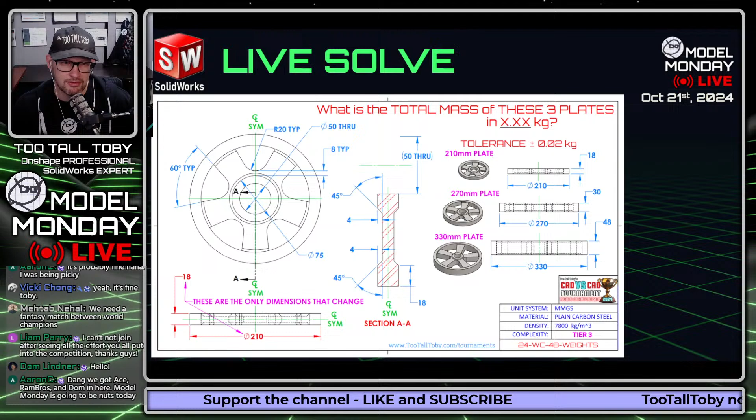What we're going to do today is 2 CAD speed modeling challenges. We're going to have some tournament updates. We're going to do a live solve using SolidWorks, and we're going to talk with the best chat ever. The live solve I'm going to do is going to be this plate, the weight plates from the tournament on Friday. I just think this is a cool model. It's a cool use of configurations and configuration tables in SolidWorks. I think it'll be fun to do configuration tables here using SolidWorks. We'll talk a little bit about that in just a few minutes.

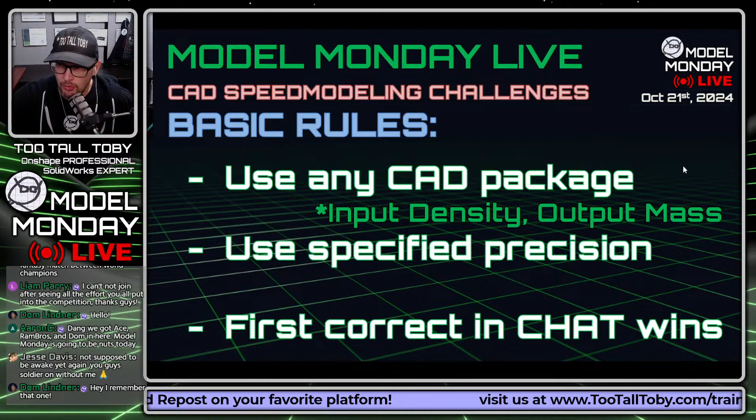Make sure that when you go to answer, you use the specified precision. So if I say answer in x.xxx, make sure you answer in the specified precision. The first correct answer in the chat will be declared the winner, will earn a point, and will end up on our Model Monday Live leaderboard on the website.

For this Model Monday Live episode, the materials that we're going to use are going to be plain carbon steel, 1060 aluminum, and ABS with the densities listed below. Make sure you've got the correct densities, otherwise you're not going to come up with the correct mass. You might need to create a custom materials library to facilitate that, but just make sure that you've got these correct densities ready to go so that you can compete and have fun and see how you do against the pack, and just see if you can even finish the challenge in the allotted time.

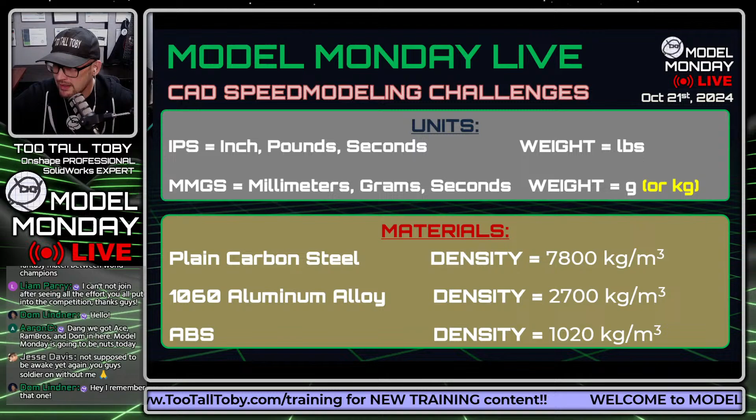Even that in and of itself is quite the achievement. Finally, the advanced rules are this is meant to be fun and good-spirited. Occasionally I will make mistakes, some of my drawings are a little questionable. We use what we call the Toby standard here on TooTallToby. And the Ivan exploit is permitted. Don't think you're going to be able to use it in the first one, you might be able to use it in the second one today.

And if you're not familiar with the Ivan exploit, I just want to say Aaron C. and I made some great progress on that video last week. It's just about done, we're doing some mixing with the audio, trying to get all the audio levels right and everything. But that video is going to be out any day now, so you guys keep looking out for that. Put a 1 in the chat if you're excited about the Ivan exploit video.

Aaron C. and I are, it's a real work of art. We've had some back and forth on it. We had to cut some stuff, leave some stuff on the cutting room floor. We might end up doing a director's cut, an extended 3.5-hour version of the video at some point. But for now, we're just trying to get out the regular 5-minute video to explain the Ivan exploit. So it's going to be coming out very soon.

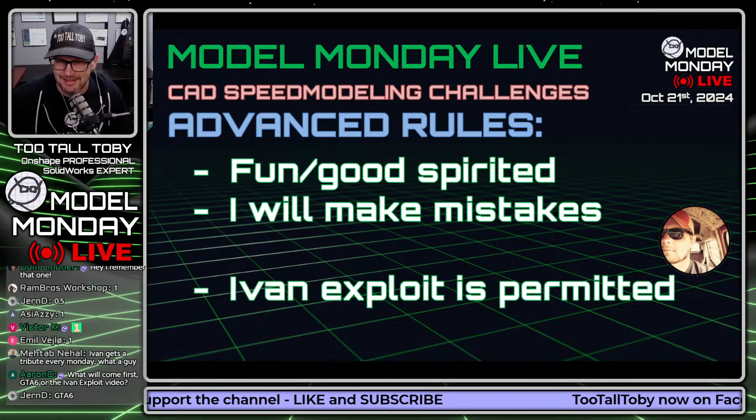Which will come first, GTA 6 or the Ivan exploit video? I mean, if we keep making progress the way we have been, me and Aaron C., it's going to be out any moment now, any moment.

All right guys, with that, let's get into our first challenge. As soon as I show this 2D print, I am going to challenge you to take that 2D print, make a screen capture so you can move it over onto your second screen, and then use that screen capture to model this part. Then we're going to keep talking about what's going on in the world of TooTallToby. So here we go. This very first challenge for all of you begins in 3, 2, 1, go.

What is the mass of this part in XXXX grams? This part is called fully defined, 24-10-11. You can see there's some notes in the upper left. The model is solid. That decal is for illustrative purposes only. You can tell this is an Australian rules football. Pretty wild sport, it's played on an elliptical field or an oval field, not a rectangular field. What is the mass of this part?

Plus or minus 3 grams. It's a solid part. You'll notice there's this groove running through the model in 2 directions. That groove has the same geometry. It's called out in that detail view and also in section CC, so look out for that groove. It all kind of comes together in the middle there, so the part's symmetric in 2 directions. What is the mass of this part?

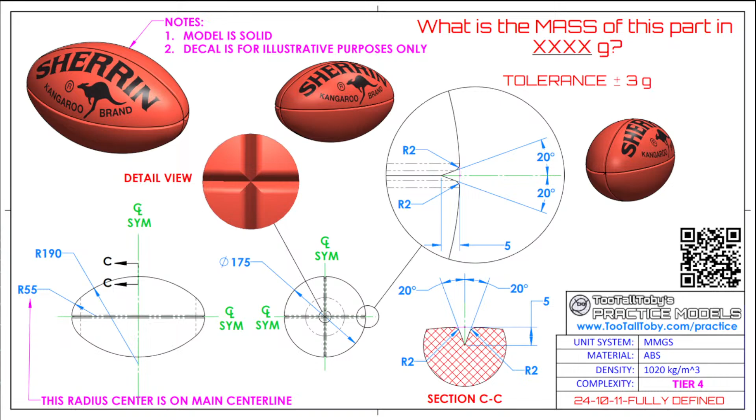All right guys, take a screen capture. Make sure that you have that model, that image captured onto your second screen so that you can continue modeling while I continue talking to all of you about news from the wonderful world of TooTallToby.

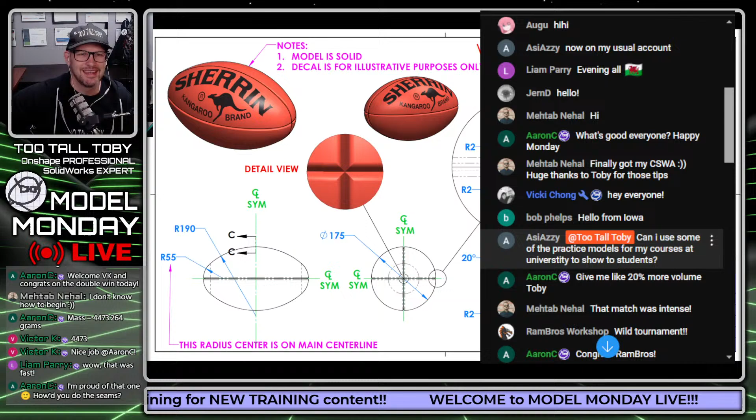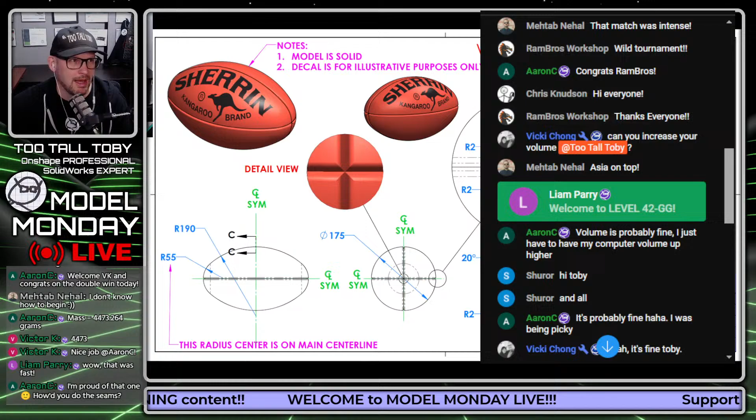As far as what's best for everybody involved, the best thing is to get them to sign up on the website or to get those party packs, and then you can print those out. You can use those party packs however you want - print them out, share them, do whatever you want with them. Maybe don't email around the PDF, but if you need to use it as an instructor, that's fine.

Let's see here. How did we get an answer already? Aaron C came in with an answer right away. Victor K came in right behind him. Liam says, wow, that was fast. Yeah, that was fast, my goodness.

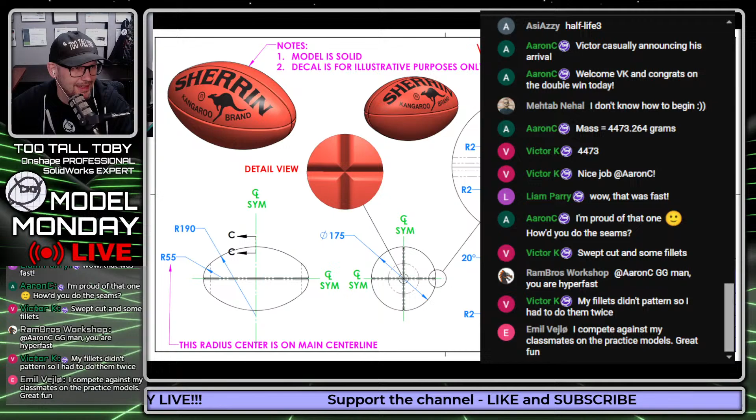Little discussion there of how to build the model. I like it, keep it going guys. Everybody in the chat can learn.

Emil in the chat says, I compete against my classmates on the practice models - great fun. Nice, awesome, that is awesome. Yeah, that's great, and we're continuing to evolve that app. That's why we want to get as many people using the current version so we can keep in touch as we continue to evolve it.

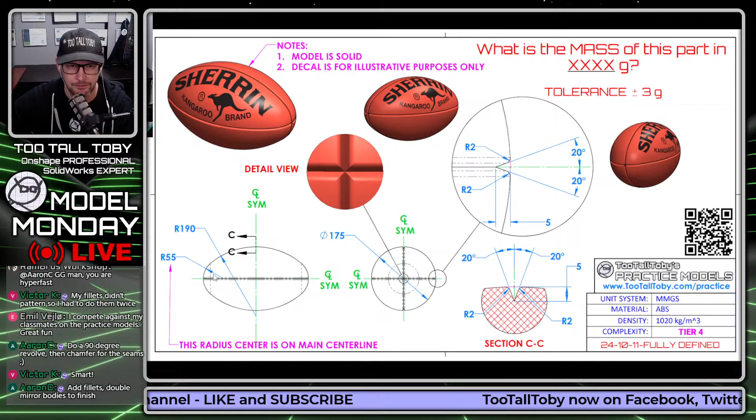All right guys, take a look at the chat if you want to get some pro tips from some of the fastest speed modelers in the world on how they're modeling this current part so fast. They're having a good discussion - always good to learn from these guys that are finishing so fast.

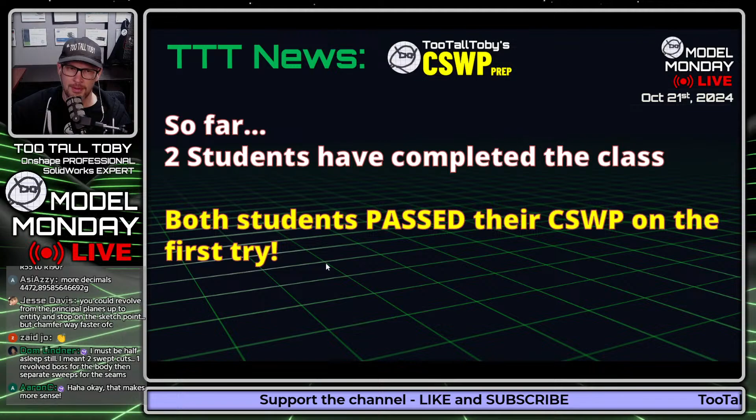It really does give you everything you need. There's even a section where I talk about how to get a hold of a free CSWP certification code. Maybe you didn't know how to get your CSWP certification for free. There are different avenues you can go down to get it, and sometimes those avenues are open and maybe you don't know about them. We talk about that in the training class as well.

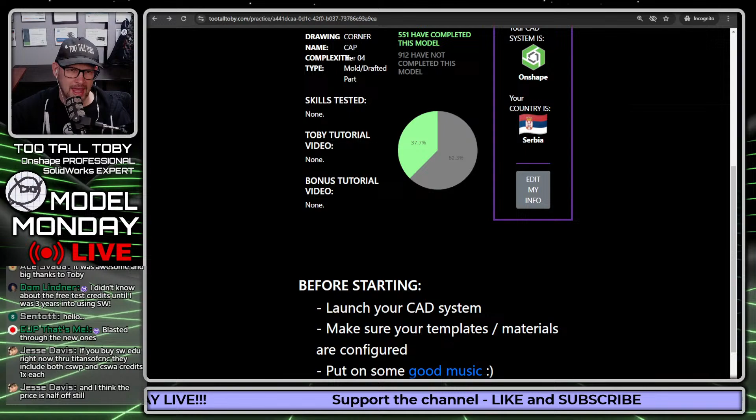Jesse Davis says, if you buy SWEDU right now through Titans of CNC, they include both CSWP and CSWA credits, 1x each. Nice, that's a good deal. You could buy that, you could buy my class, and then you could be on your way to getting CSWP within a weekend. You could do it all in a weekend.

EUP says, I'm always right-clicking on that drawing to open in a new tab so I can read the details. Yeah, that's a good enhancement request. Appreciate that, EUP.

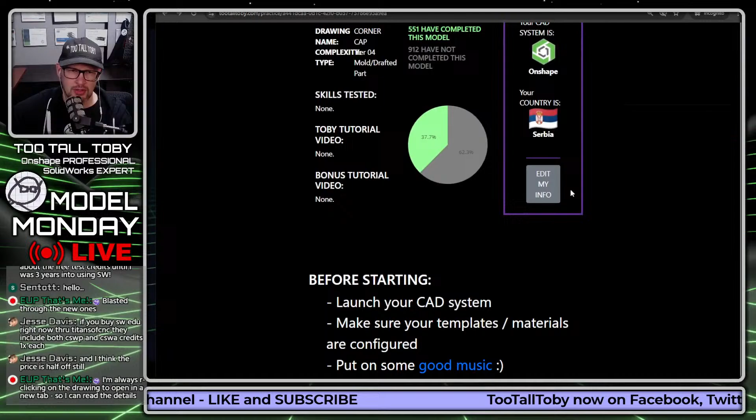If the drawing ends up too small, you can zoom in or out, but then the clock gets small too. The drawing doesn't really change when you do that anyway, maybe once you get to a certain point it gets a little bigger. You can hold control and use the middle mouse button to zoom in and get it a bit bigger. It looks like once you get to a certain point, it becomes reactive.

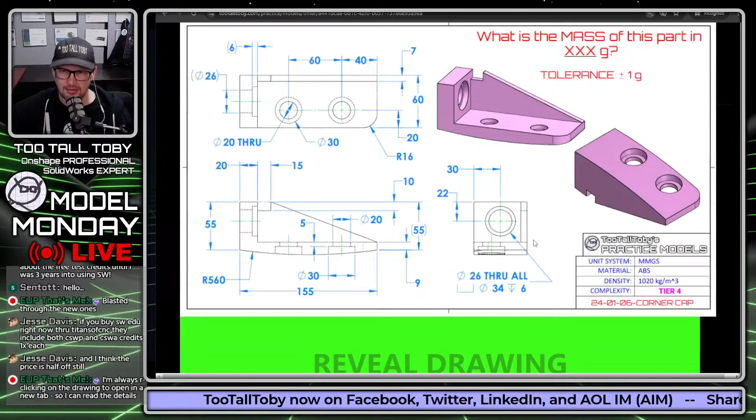So that could be a hack, or like you said, you could move it onto another screen, or right mouse button, open image in new tab. Oh yeah, that's a pro move right there. I thought you were saying that was an enhancement request - it already works! Sweet, thank you.

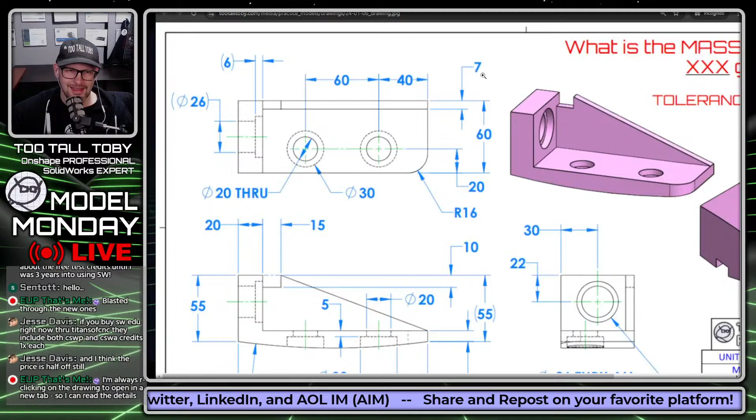Yup, that's me. EUP, that's me. That's awesome.

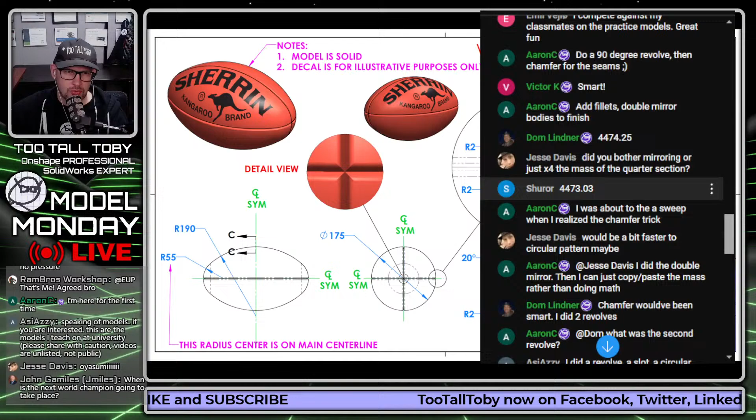Let's see here, the first answer comes in from Aaron C., 4473. Victor K., 4473. Dom, 4474. Shuror, 4473. Rambros Workshop, 4473. Azi, 4472.8958564, 46692 grams, very nice. Who else we got in here? Anybody else coming in with an answer? Just a few people trying to take this one on.

That's all right, everybody's saving up their energy for the second one.

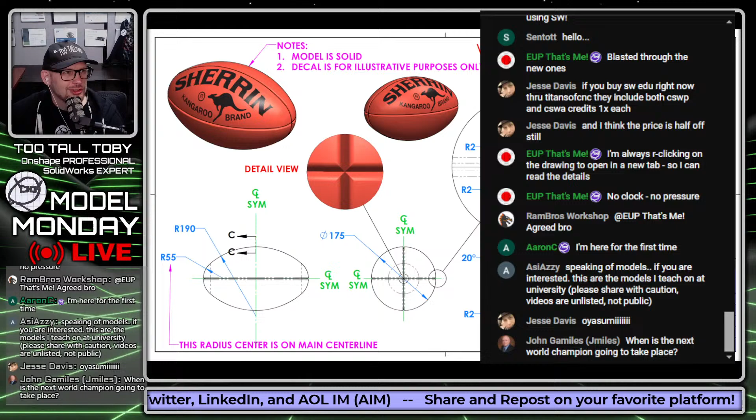John is in the chat: when's the next World Championship going to take place? Probably next year, we'll have 1 or 2 tournaments between now and then. The World Championship usually runs in October, usually the finals run October, November, depends on how we schedule things out. But I like this timeline we did this year, we started August 30th and ended October 18th. That's a good spread, a good 6-7 week spread, I like that. Probably do similar timing next year, but we'll have other tournaments between now and then.

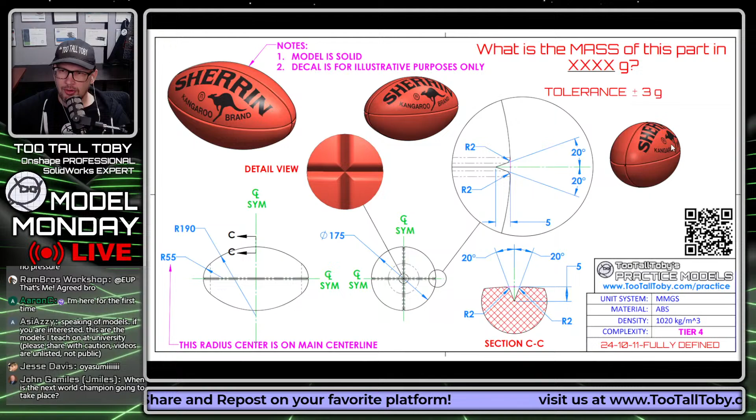Guys, the correct answer for this challenge... maybe we should talk about why this challenge even came into existence here. Fully Defined, you can see it's Australian rules football.

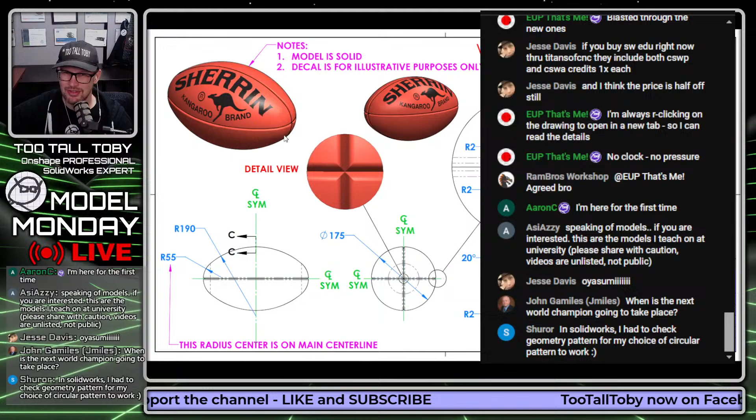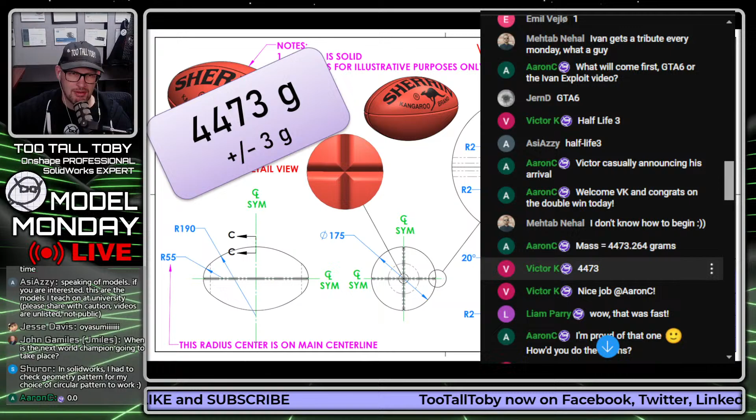Guys, the correct answer to that challenge was 4473, and that means that the winner of that challenge was none other than Aaron C, coming in with that first answer, 4473 grams, plus or minus 3 grams. Gave you guys lots of tolerance on that because it's a pretty high number. 4473 grams, that is correct.

Well done my friend. I liked reading through, seeing how you guys did it. It was really interesting. I didn't do the same thing Aaron C did, a 90-degree mid-plane revolve, then added a chamfer for the seams. I didn't do that, I did it with a sweep. I did a 90 degree mid-plane revolve, so I ended up with this little section here.

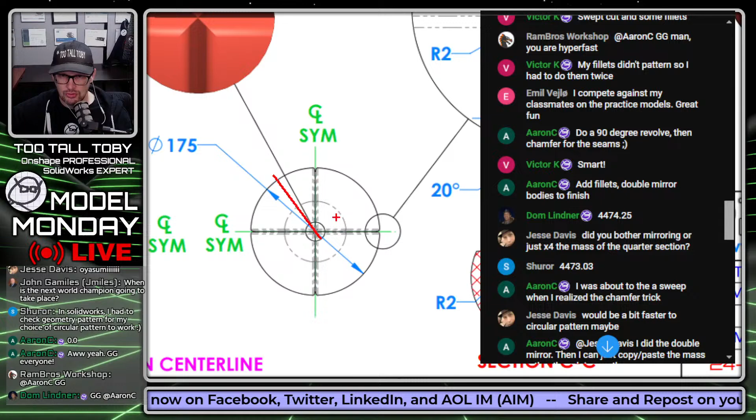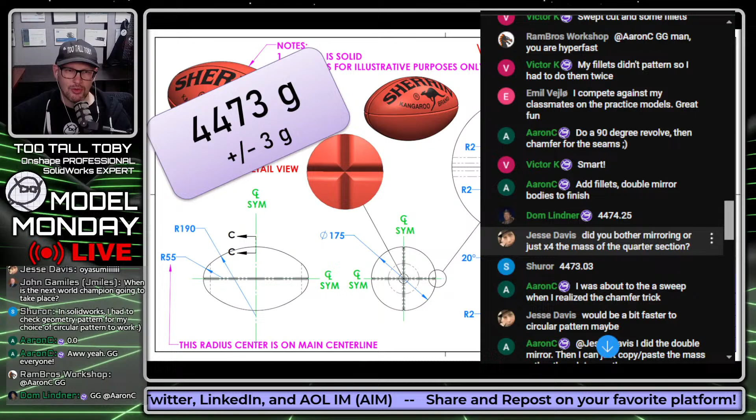And then I did the sweep, and then I patterned that around 4 times. So there you go, sweep, then fillets, then patterned it around 4 times. Pretty cool, I like being able to read through and see how you guys did it. I love seeing all the different suggestions.

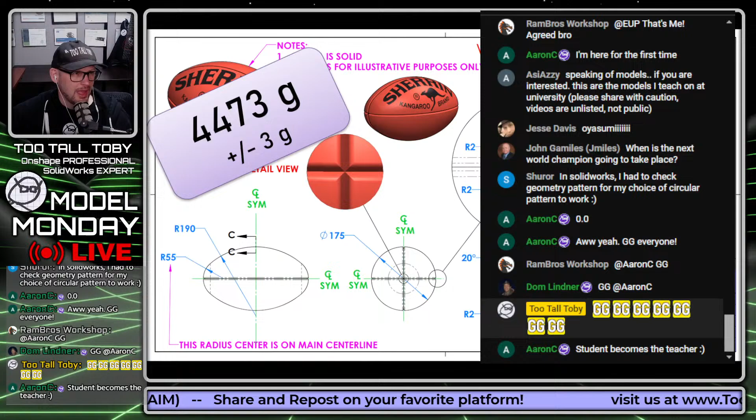Please use it liberally. All right guys, super fun part though, yeah. Yeah this is a cool part, I like it. Sounds like a pretty complicated game, Australian rules football. Like I said, it's played on a round pitch or oval.

All right guys, here we go, next challenge. G, I got it. And number 1, very nice, very very nice. All right guys, here we go, next challenge. This next challenge for all of you begins as soon as I go to full screen, and that challenge begins in 3, 2, 1. Go. What is the mass of this part in XXXX grams?

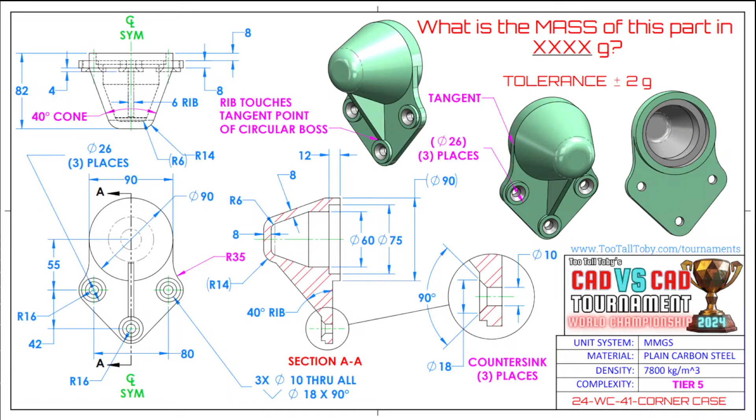Now this one's going to take a little while, so I figured this would be a good time to go through and do a little of what we like to call a live solve. We're going to do this live solve using SolidWorks, a wonderful 3D CAD program, parametric 3D CAD modeler, that will allow us to introduce some new stuff.

Blue Byte Systems in the chat. You got to fix your username. Amen Jlili is here. Welcome my friend, thank you for joining us. I just gave you a shout out the other day in the Discord, too. Somebody was asking about API tutorials and assistance. Welcome, welcome. These guys really know their stuff when it comes to API tutorials and assistance and custom programming in SolidWorks. Blue Byte Systems, check them out. Say hello, old friend of the show.

Welcome, welcome. So what we're going to do is a little bit of SolidWorks 3D modeling here, a little bit of what we like to call a live solve. And what this means is that we're going to take a look at this 2D print, and we're going to try and solve the answer to this challenge live right here, right now for all of you using SolidWorks.

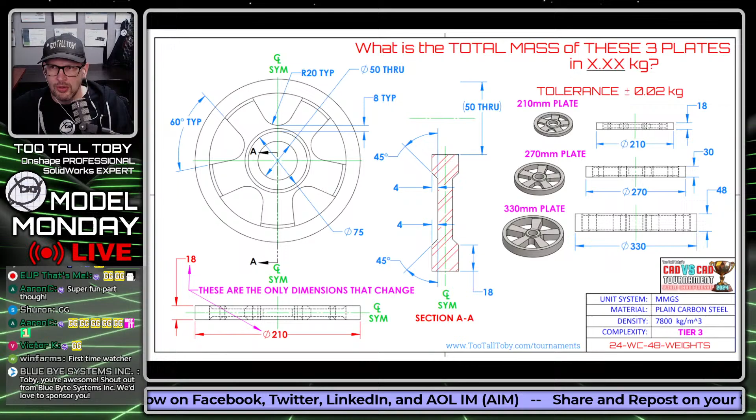What is the mass of these 3 plates in kilograms? Now this is a kind of cool, fun model because there's not only a few ways to solve the model itself, but there's also a few ways to solve the question. The question is, what is the total mass of these 3 plates in kilograms? So how do you come up with that total mass?

Do you make an assembly? You can make an assembly and add 1, 2, 3, but then that would mean you have to model all 3 of them. Do you do it with configurations? Do you just make one, calculate the mass, type it somewhere, and then modify the model and type the mass in, like type it into calculator plus, then model the second one, type it into calculator plus, then model the third one, type it into calculator, enter, and now you have the total mass in kilograms? There's a lot of different ways you can come up with the answer as well.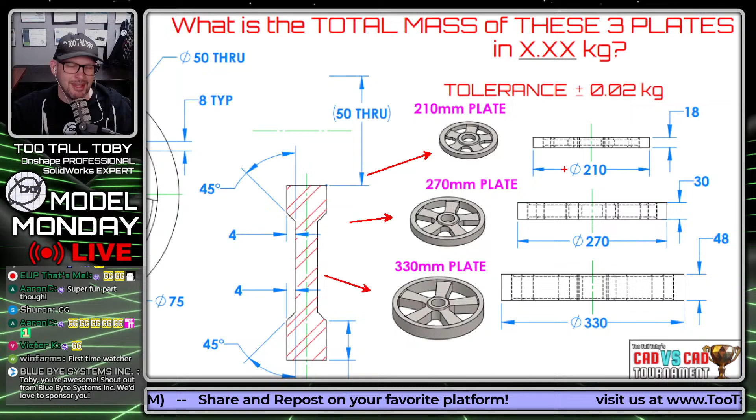So what I'm going to do is I'm going to go through and model it using SolidWorks. I'm going to model it using configurations because it'll give us a good chance to look at what are called configuration tables. And that's something that you actually need when you take the CSWP. You have to know about configuration tables. It's something that comes up when you take the CSWP - they're going to ask you a question specifically on creating and managing configuration tables.

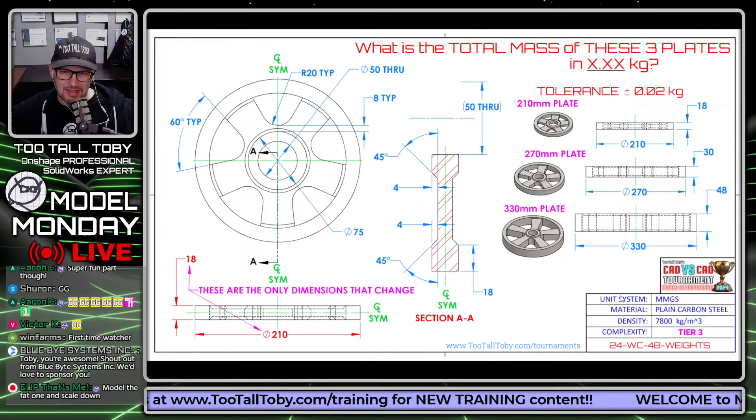Yup, that's me. And the chat says, model the fat one and scale down. Unfortunately, it's not scale - it's only these 2 dimensions here that are changing. These are the only dimensions that change: 18 and 210. Nothing else changes, so everything else is staying the same. Only those 2 dimensions are changing. What is the total mass of these 3 plates in kilograms?

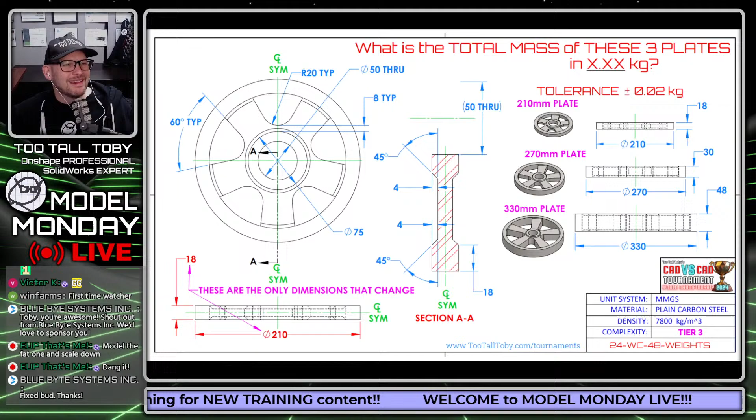Yeah, so anytime we're modeling up a part in 3D from a 2D drawing, the first thing we need to do is think to ourselves, what's the first sketch going to be? Blue Byte Systems fixed it, nice. What is the first sketch going to be? Where's the origin going to be located?

So we're going to go through, we're going to model this thing up in SolidWorks as a live solve. And here we see what that 2D print looks like. Whenever you're going from a 2D print into a 3D model, one of the first things you have to determine is where will my origin be and where will the first sketch be located.

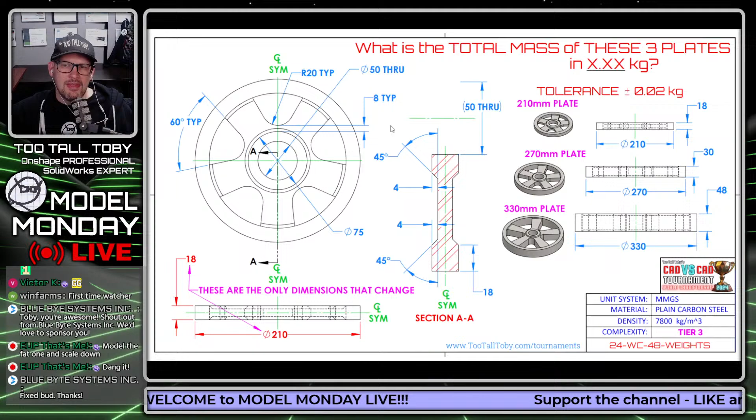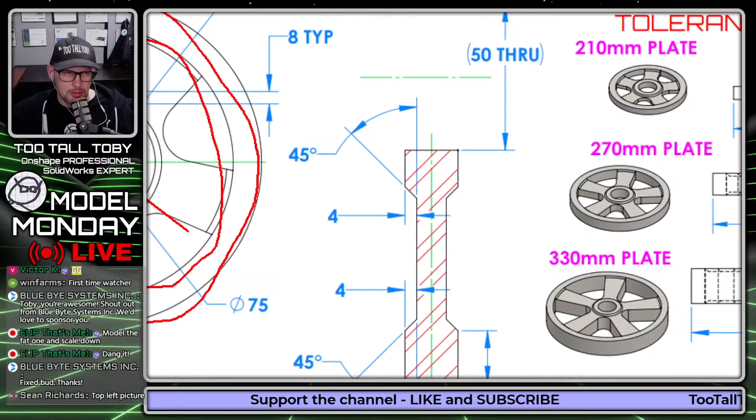In the case of this model, it's tempting to say that the origin is going to be right here in the center, and I'd agree with that. Whenever you have a round part, that's pretty much where the origin is going to be. It's tempting to say my first sketch is going to be this revolve sketch, then the inside, then the spokes. That's an option, but a smarter option, one we saw some tournament runners use, is to create a center line at the origin and create this shape as your first sketch. So that's what we're going to do.

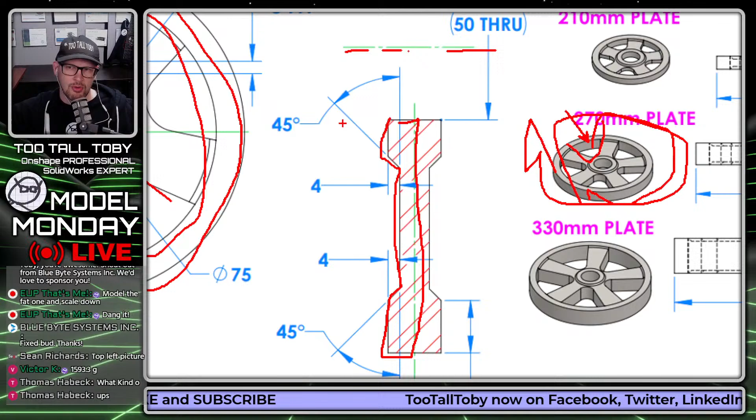We're going to create this shape as our first sketch and use it to revolve into this overall plate. Then we'll do a cut extrude for one of these triangular shapes to remove material, and then a circular pattern of that cut extrude to pattern the spoke around. From there, we can find out the answer.

What is the total mass of these 3 plates in x.xx kg? You can see that when it comes to these 3 plates, the only dimensions that are changing are these dimensions here. The remaining dimensions on the model are staying the same.

So let's take a screen capture of that. Go new here, do a screen capture. I'm going to take that screen capture and move it over to my second monitor. Then I'm going to change my layout here so you guys can see some of my keyboard shortcuts as we're going through and modeling this. We're going to model this up in SolidWorks. I'll be using SolidWorks 2020 here because I like it and think it's good.

Now we're going to do a new part here. The part is going to use millimeters, MMGS, and plain carbon steel as the material. You can see I've got a template here for MMGS and plain carbon steel. It's always good to have templates to help you save time and save repeat work.

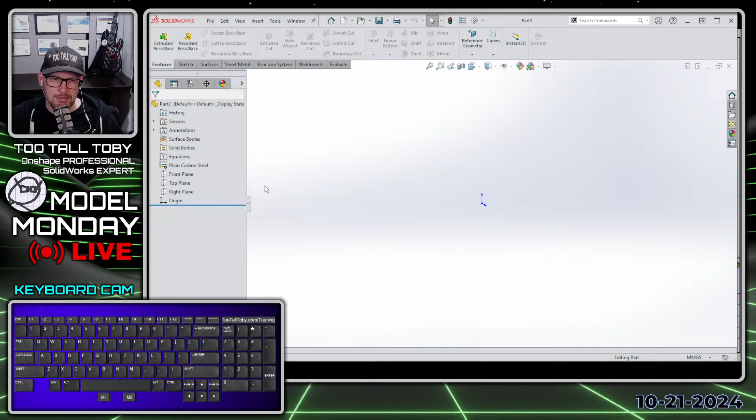What I'm going to do is go to my right plane, begin a sketch, orient the view, and then choose to create a center line right at the origin. That gives me my starting point for this overall design.

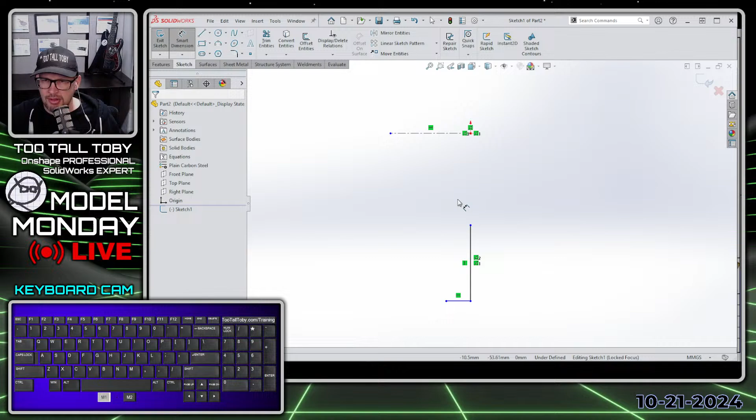Sometimes what I'll do is create part of the design first - maybe a line that comes down like this and then a line that comes over. Then I'll hit escape, press the S key to go to my smart dimension command, pick the center line, pick this line down here, and choose to make this a doubled dimension. As I cross over that center line, it becomes a doubled dimension, so we'll double that over to the other side and type in the value 210, 210. That helps me get a sense of proportion.

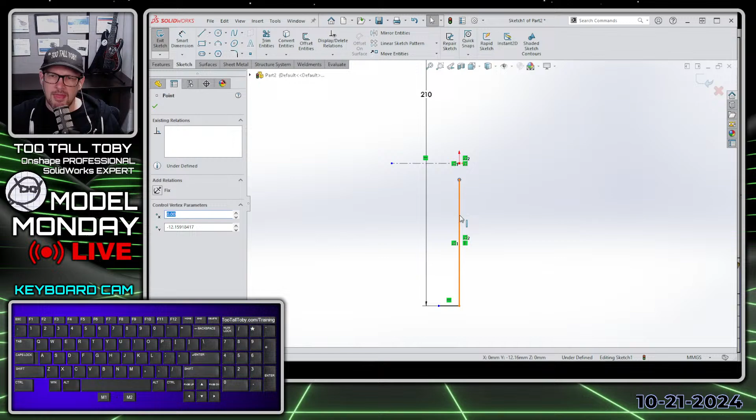Now this line going up is actually going to end up being a mirror line. So I'll just drop it wherever I can up here, then click on that line and choose to make it for construction, because now I'm going to draw this line that comes up in this direction, to a distance of 18. Enter. I'll create a line at 45 degrees, a line that goes this way, a line back up at 45 degrees, and a final line in this direction - this final line will go to our ID of 50.

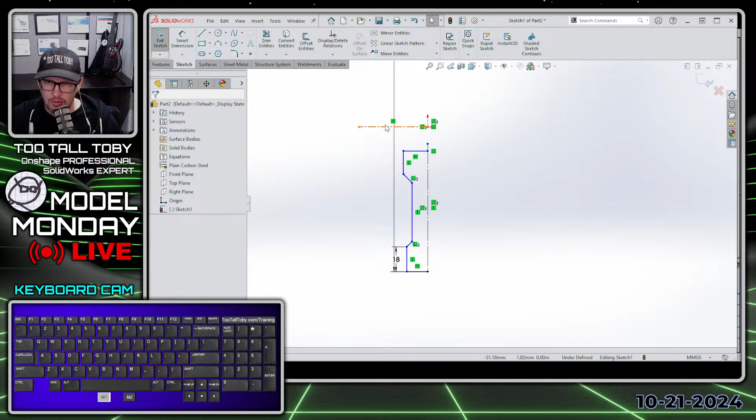So I'll close off that sketch, hit escape, and now I've got all this geometry right here with that center line. I can take that geometry, window select it - you can do a window select or a crossing select, either one - then choose mirror entities and quickly mirror that geometry right across.

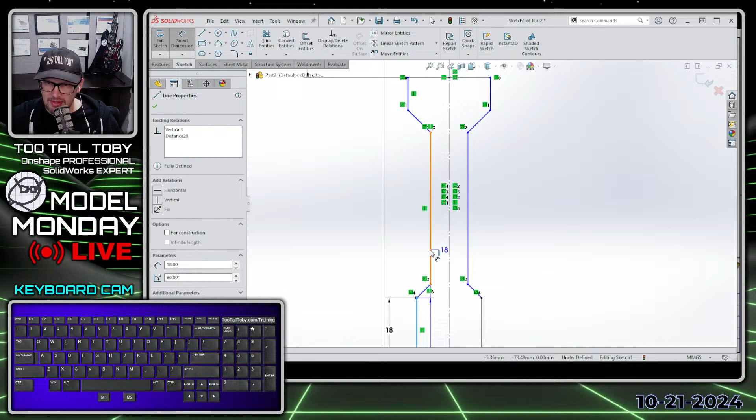Now it's just a matter of adding a few dimensions, like this dimension here to the ID, again crossing over that center line. That's going to be 50, and this dimension from this line to this line, the overall width of the plate, is going to be 18, at least for this first version. Then the distance from this line to this line is 4, and the distance from this line to this line is also 4.

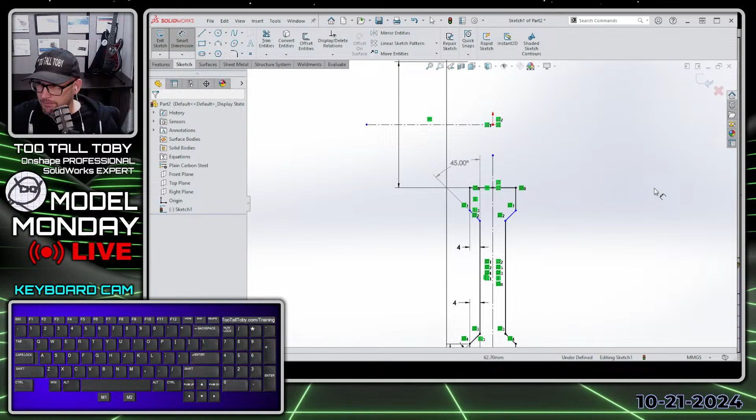Of course, we could also make those lines collinear. The angle here is going to be 45, and it looks like I picked up on a perpendicular relationship, so I could skip this extra angle dimension, although if I do put it in, SolidWorks will just automatically make it driven, since I set that option the first time it asked. Now I'm going to create the final dimension from this point to the center line, crossing over the center line, and that's a dimension of 75 millimeters.

Now I've got a nice fully defined sketch, with all the geometry I need for that revolve. Since this sketch has multiple center lines, I'm going to pre-select the one I want, then choose Features Revolve, so SolidWorks knows which center line to use. If you only have one center line, SolidWorks automatically puts it in that box; if you have multiples, you can pre-select it. So we hit the green check mark, and there we go.

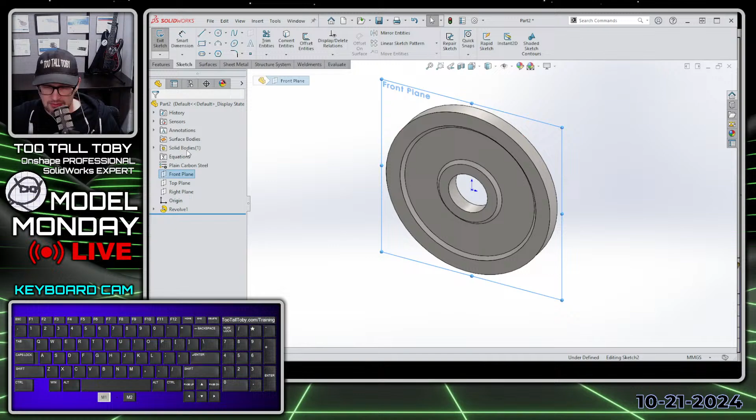There's our first feature, and that's really the majority of this part. Now all I need to do is get that cut extrude in there. So I'll choose the front plane, begin a sketch, orient my view, take this edge here, since that's kind of the outermost edge of that cut extrude, and choose to do a convert entities there.

So now that's a circle traced right over that edge, a circle in the current sketch. Then I'll create a line that comes from that circle, down at an angle, back to touch the end point, into a radius with a single click, coming off of that with a tangent relationship.

Let's see, where's tangent? Is it this one or this one? This one — tangent relationship — and drop that onto that line as well. Nope, that wasn't tangent, so I'll just pick this point here and choose to make those tangent.

I don't want these two lines to be perpendicular. You can see SolidWorks gave me perpendicular there — I don't want that, so I'm going to click on that line and press delete. Then a little trick you can do is take this point, hold control, pick this point here, let go of control, and make those vertical.

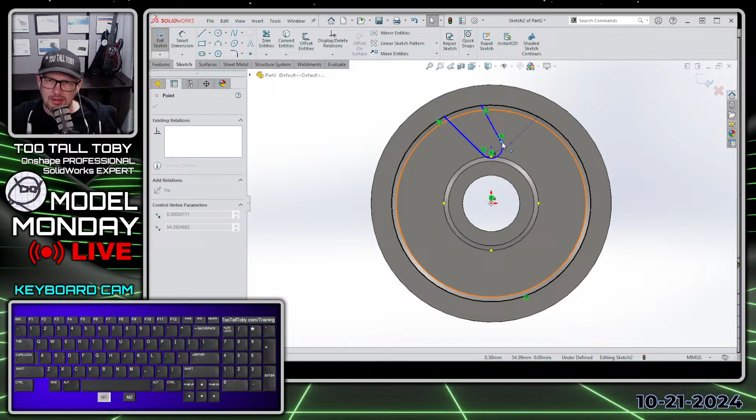You can see that when we did that, it got close to being symmetric, but not quite yet. So now I could take this line, hold control, take this line here, let go of control, and make those equal, and now you can see it's behaving symmetrically. You could go in and create a symmetric relationship, but a lot of times just making these two lines equal, with the center point vertical, is a quick way of enforcing natural geometric symmetry.

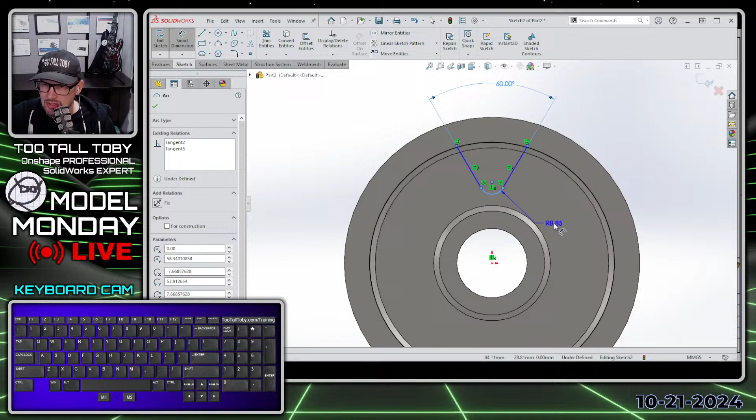So all I need to do now is create this geometry, the angle dimension, which is 60 typical, and the radius dimension here, which is 20. Then finally I need to create a dimension from tangency to tangency, done by holding shift on the keyboard. So I hold shift, pick this arc, let go of shift, single click to drop the dimension, and that's going to be a distance of 8 millimeters.

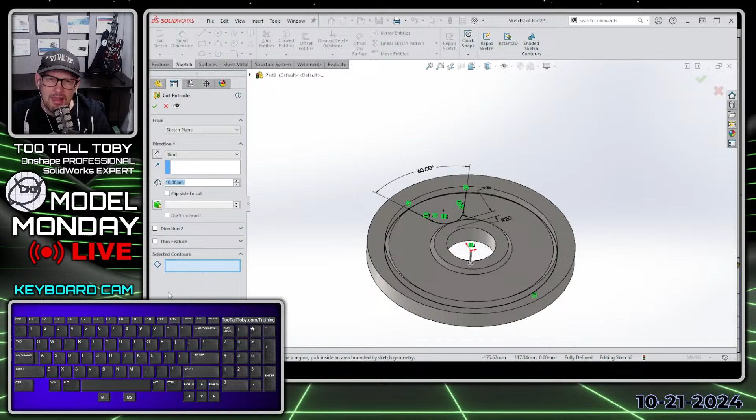Now I could either trim this sketch or just leave it completely closed as is, overlapping like a bad sketch. If I leave it as a bad sketch, I can press the S key, choose extrude cut, and then come down here to contour selection and choose that contour.

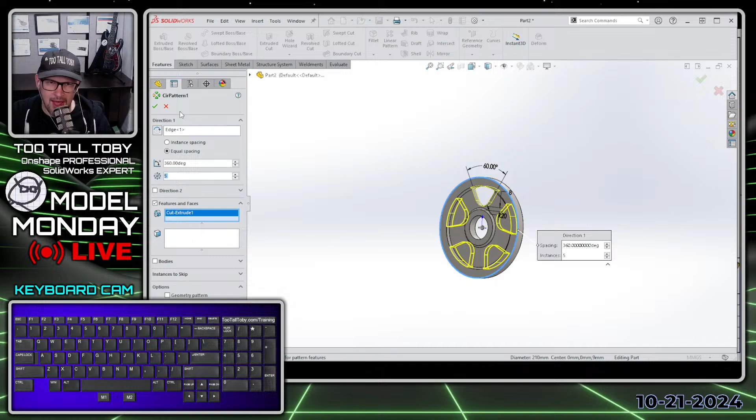Then I can right mouse button in the background and say extrude through all in both directions, then right mouse button again. That gives me one instance of that thing. Now I could choose to create a circular pattern. For the circular pattern direction, I could choose this outer edge. For the feature to pattern, I could choose this face here of the cut extrude, and then bump this number up to 5 instances of that cut extrude. There we go, there's one instance of that plate.

So now I'm going to save this because I am going to put this into an assembly. I'll call it plates. And now what I'm going to do is create multiple configurations of this plate.

In the old days, the way we created configurations was we would go over here to the configuration tree, right mouse button on the name of the part, and say add configurations, and add one here called medium. Then we would double click on the plate, double click on the dimension we want to change. So I want to change this 210 dimension, I'll double click on it, and then we would say we want to change that dimension for this configuration only.

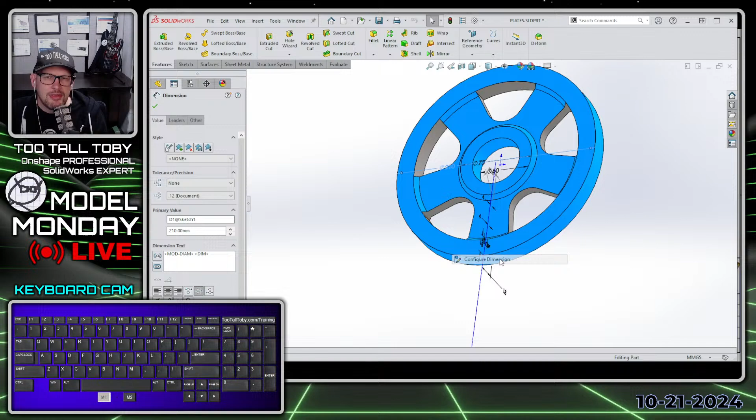But in modern builds of SolidWorks, you don't have to do that. It's much easier to manage your configurations. The way we do that is using what's called a configuration table. We access that table by double clicking on the part, right mouse button on this dimension, and choosing configure dimension. This automatically brings up this table here where we can on the fly create new configuration tables.

Now, one thing worth noting is some functionality you're going to need to know when you get into your CSWP prep class. The CSWP prep class definitely has a section on creating these configuration tables. It's when we get into part 2 here of configurations, chapter 4 in the actual training class, but part 2 of the CSWP exam. You have to get into working with configurations, making changes, and understanding how to manage configurations. So this will definitely be helpful. If this is something you need to do a lot of as you're prepping for your CSWP, if this is something you've been struggling with, pay attention here because this is definitely going to help you.

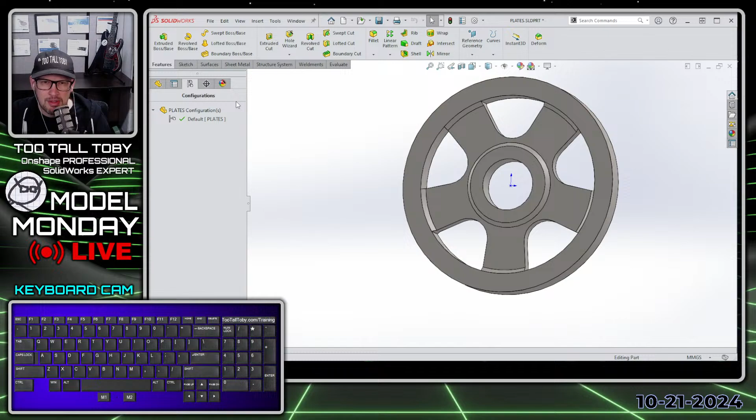So what I'm going to do now is look at my configurations. I currently have one configuration here called default. I'm going to double click on the model, and I'll see the dimensions from the revolve show up. I'll right mouse button on this dimension and choose configure dimension. Once I choose that, I'll type in configuration name 210 and press enter. You'll notice over here in the tree, a new configuration was just created. So all I did was type in 210, press enter, and now a new configuration's been created in my SolidWorks configuration tree. Pretty cool, right?

So I could come over here and type in 270, enter, and type in 330, enter. And we can see here that in the column header, the name of the dimension is D1.

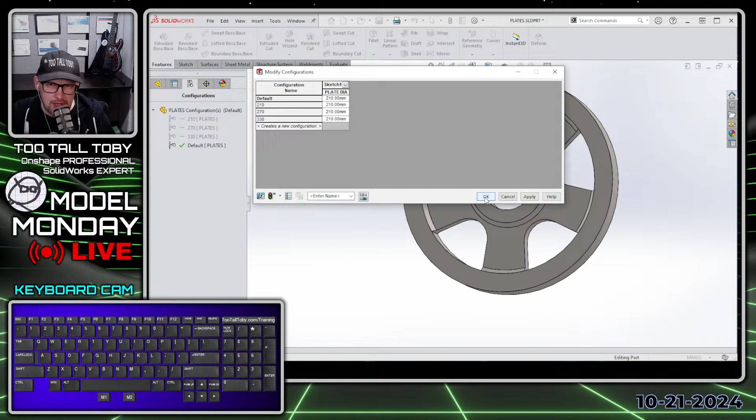With that name of the dimension, I could right-click on it where it says D1, and choose rename, and call that plate diameter. Now if I press enter and then just choose OK here in this configuration table manager...

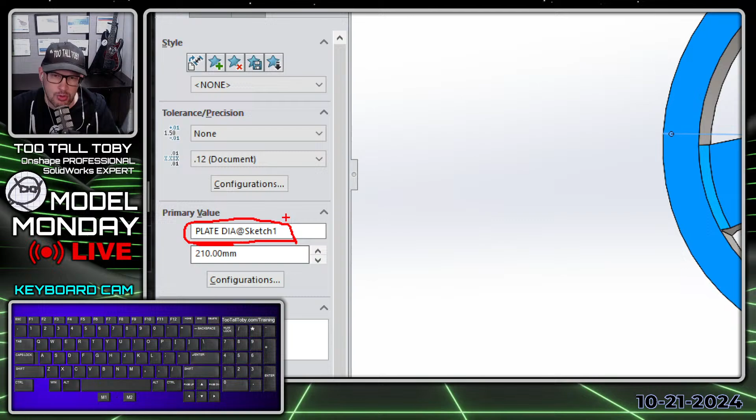What I'll notice is that now if I double click on the plate and click on this 210, you'll notice over here where it says primary value, the name of that dimension has changed. So when you're working in the configuration table, it's like a bidirectional driving tool. You're driving the creation of new configurations, you're driving the names of sketch dimensions and of feature names in your model, and that can be really helpful to organize a project.

There's a lot of dimensions here in Sketch 1. I don't want to have to be dealing with D1, D2, D3, things like that. I want to know right away what those dimensions are called.

One way we can do that is we could click on that dimension ahead of time and call this plate width. That's going to be helpful, because when I go to add that dimension to the table, it's going to give me that name.

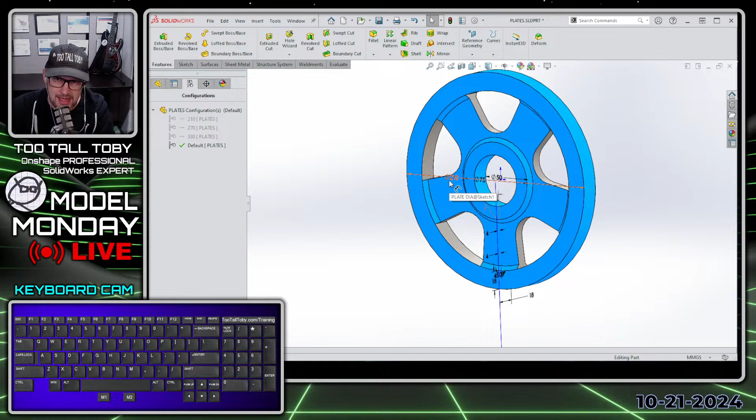But another way is we can get into the configuration manager, the configuration table. You right mouse button on a dimension and say configure dimension, and then here's the table. At the top of the tree, you can right mouse button and choose rename as well.

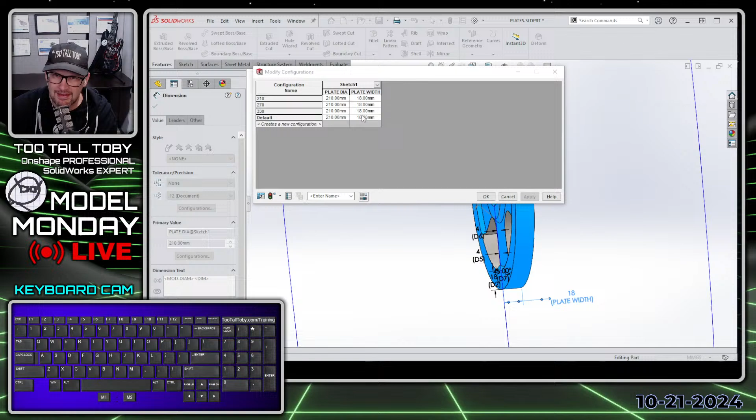You can also see here that we can choose another dimension. So I can double click on this dimension here, and that adds that dimension to the table as well. Now I've got my 3 configurations, 210, 270, and 330.

I've got these parameters for plate diameter and plate width, which I can change for each configuration. I could change this dimension to 270, enter, change this one to 330. Using my arrow keys to navigate through here, this one changes to 30, enter, and this one changes to 48, enter.

I really don't need the default configuration anymore, so I could go over here, double click on 210, and just delete that default configuration. When I'm done, you can see here that now I've got 210, 270, 330.

I didn't have to access Microsoft Excel at all. I'm doing this all right in the built-in tools in SolidWorks, able to quickly go through and change those configurations.

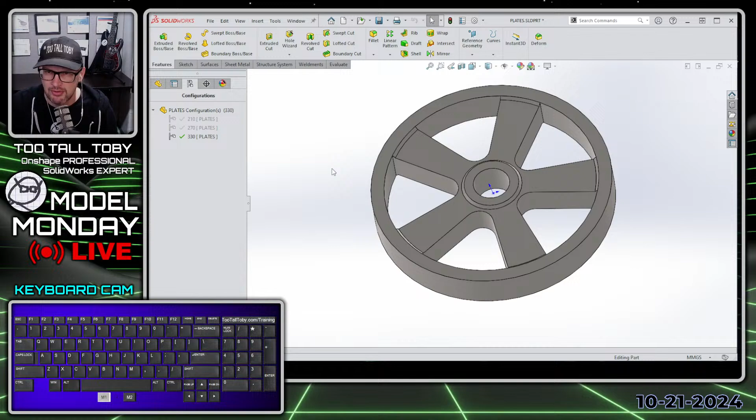Now I could choose to create a new assembly. We'll just go here and choose our assembly template. Then in the assembly, I could press the R key on my keyboard for recently accessed documents, and drag and drop this plate in from there.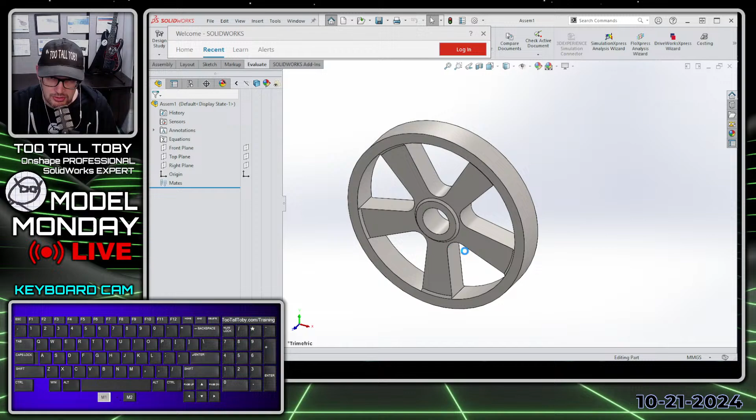I'm going to bring this into configuration 210. I'll hold control and drag a face of this part to make a copy, then hold control and drag a face again to make another copy. I'll click on this copy, come up here, and change that one to 270, enter.

I'm going to click on this one here, choose to change that one to 330, and hit the green check mark or press enter.

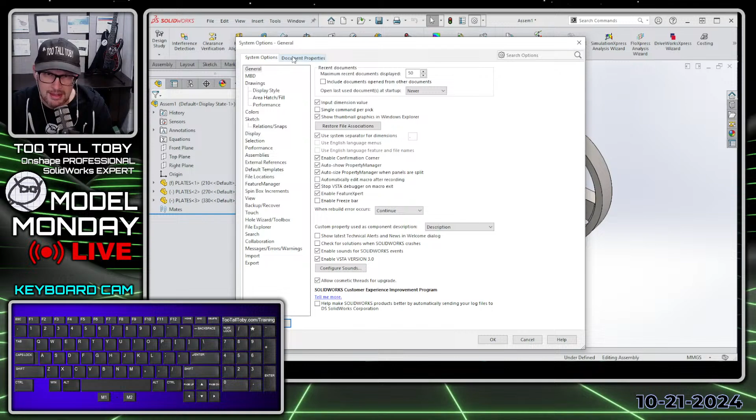Finally, I'm going to go into my options, then document properties, units. I'll say custom, and that way I can change my mass here to kilograms.

Of course there are easier ways to get to that mass and everything, but this is just one way of going through and solving this model. This is why I really like this model, because there are several ways you could get to the answer. One of those ways would be to use configurations, and here you can see how that works using the configuration table.

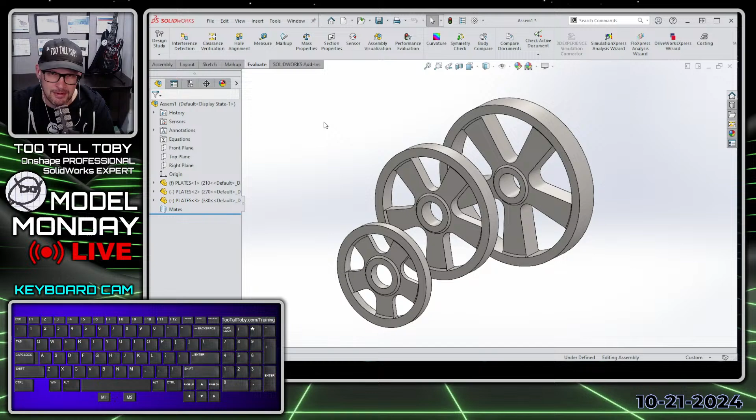Let's go into our evaluate command, mass properties, and we can see that we are coming up with a mass of 25.31 kilograms. Let's see, did we get it correct? 25.31 kilograms. We did it.

We got it correct. So GG to Toby. We did it, we got it correct. And that is how you would solve that model.

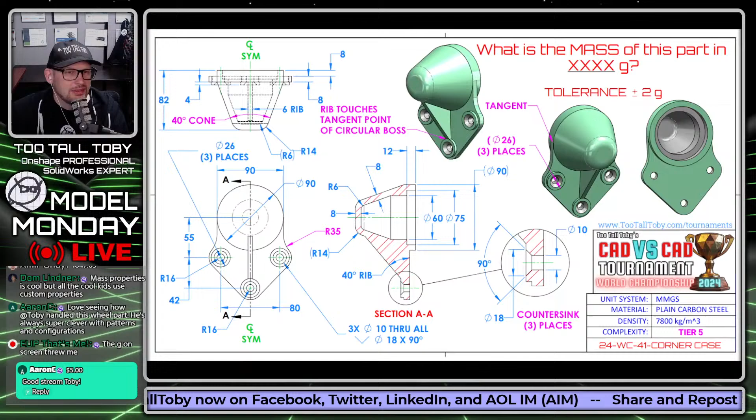So guys, the second answer here, what did we get? We were talking about that live solve, what did we come up with for the answer here in the second one? Victor K, 1593 grams. Victor K revising to 1647. Ooh, I like that quick revision.

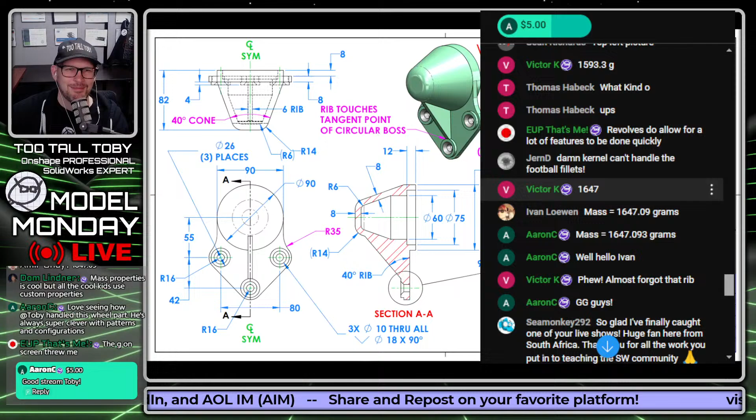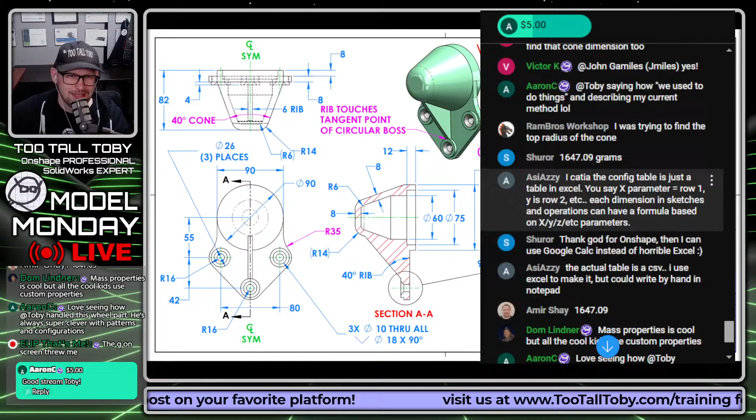Jern saying, darn, kernel can't handle that football fillets. Oh, brutal. Ivan the Reasonable - Ivan in the chat today competing, what's up my man, thank you so much for joining us today. 1647 grams, Aaron C, 1647 grams. Ram Bros, 1647. Gray, 1649. Dom, 1690, Dom revising, 1647. Shuror, 1647, well done. Amir, 1647. Nice.

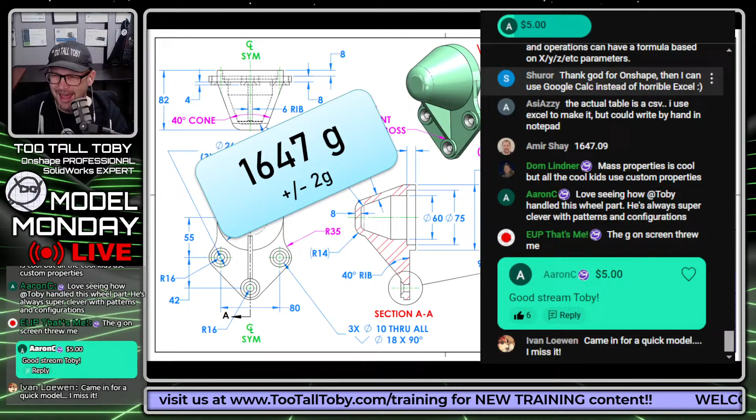Guys, the correct answer for this model is 1647 grams. So GG to Victor K getting that point, GG to Aaron C for getting the point earlier. Aaron C and Victor K going at it, competing neck and neck like they did for the full season. Ivan Loewen saying, came in for a quick model, very nice. GG to Victor K, well done my friend, well done. Congratulations, and congratulations to both of our winners today, Victor K and Aaron C.

And of course, thank you all so much, you guys really truly are the most amazing chat ever. Thank you for joining me on this beautiful Monday. What a great way to start the week. I love starting the week like this, Model Monday Live. I get sad when we have to miss them.